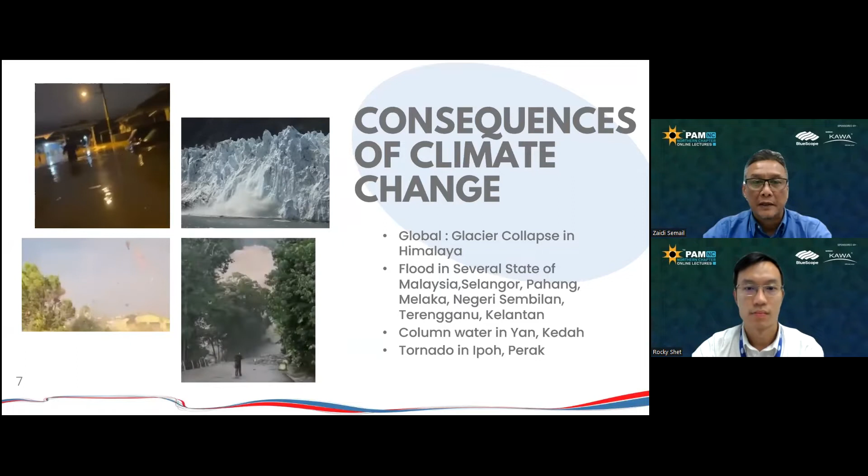Now, what can we do? This is the road to adapting to the challenging impact of climate change. So what can we do? There's a few things we're going to talk about: we have thermal, we have wind, we have water. These are the three main elements we want to talk about. Sound is of course part of the bonus you can get when designing with thermal in mind.

Quick one - so what's happening right now? I think the chairman has said it's man-made when it comes to the increasing of earth's temperature. What happened in Malaysia - because electricity was always so cheap, when I was overseas I noticed this - is that when you feel hot, everybody starts to change their aircon to be bigger. When they change their aircon to be bigger, they use more power. Then to create more power, you start burning fossil fuel to have that energy, electricity in this case. So what we're trying to do now is figure out how we can reduce this usage of aircon by controlling the temperature in our room or building as a whole.

All right, some of you architects have seen this before. This is basically, in our industry, roofing - the ability of metal roofing to adapt or even to have a custom performance that you can achieve easily. It's not like other types where you have a lot of restrictions. If you look at these particular sections of simple metal roofing, you have a metal roof on top, and you start having insulation at the bottom. As you say, you have insulation wool, you have boards, you have a lot of insulation material. Rocky, quick one - I always ask this of most engineers: what is the cheapest insulation in town? You know that?

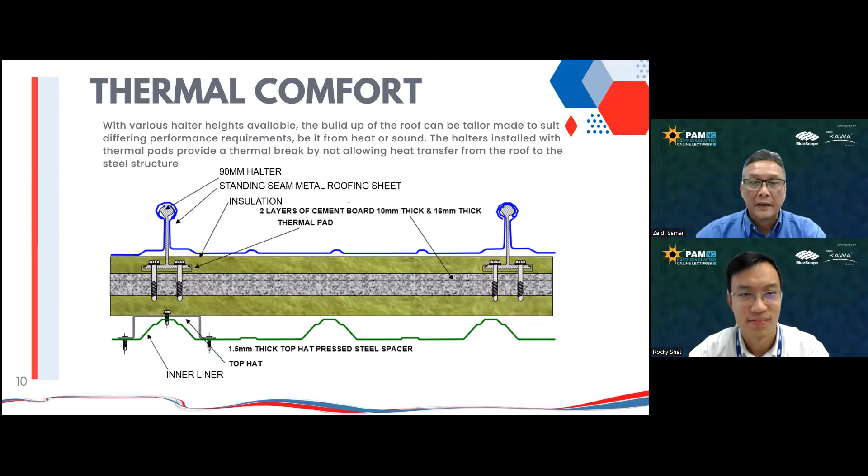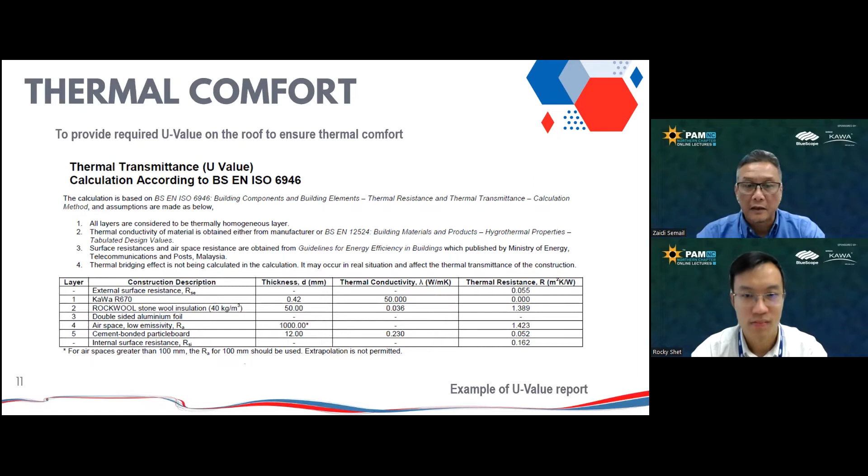I think thermal comfort is actually the ability to resist heat coming into the building. So thermal transmittance, this U value, can be calculated easily. When I say easily, it's just simple mathematics, but you need to get things right in terms of the value, especially the lambda, and also the K value, the R value. So basically, you put all the items, calculate it using the extrapolation formula, and then you get the result.

So this is a simple example: you have a metal roof on top, an insulation wool, a double-sided layer, and an airspace. And in this case, we put a cement fiber board as part of the insulation. As a result, the R value is at 0.8.

The U value must be achieved having the right thickness, not so much about other things. Thickness is very important in terms of catching the U value. So once you have the system, you can come out with a result. An example of this system comes out at 0.32 watt per meter square.

So why that? This system has been calculated as shown in this slide. It is because under UBBL 38A, most architects already know this. The roof U value, MS1525 clause 5.5, for a new or renovated building with a lightweight roof, which is metal and is lightweight, you have to achieve a 0.4 max U value.

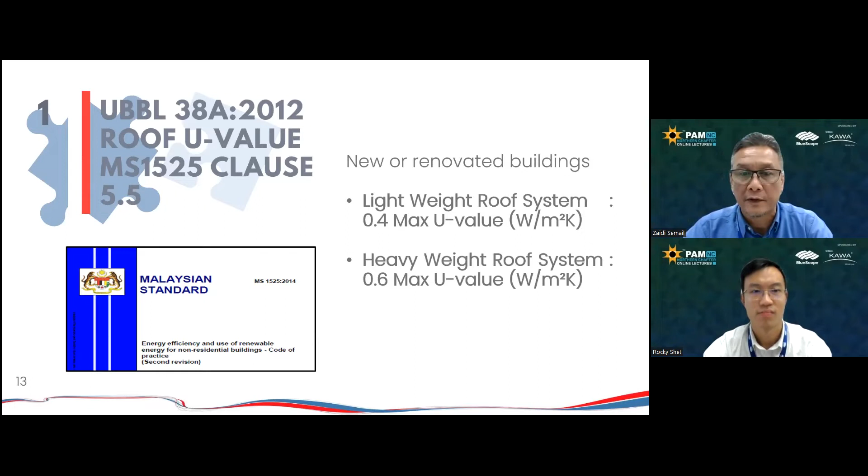You cannot go higher than that, which is no good. I think the lower the U value, the better. In a heavyweight roof, like concrete or something similar, you have 0.6. This is under Malaysian Standard 1525 2014.

Of course, GBI plays a very important role. I think architects have been given this information for GBI, how to achieve the U value, sustainable construction practice, everything. We are the ones who will be able to help you achieve it. Of course, the metal roof is always on the building. The roof is actually one of the biggest elements in a building to some extent. We talk about high-rise, but talking about a normal roof like a house or factory or normal commercial building, most of the time the roof is one of the biggest elements in that particular design.

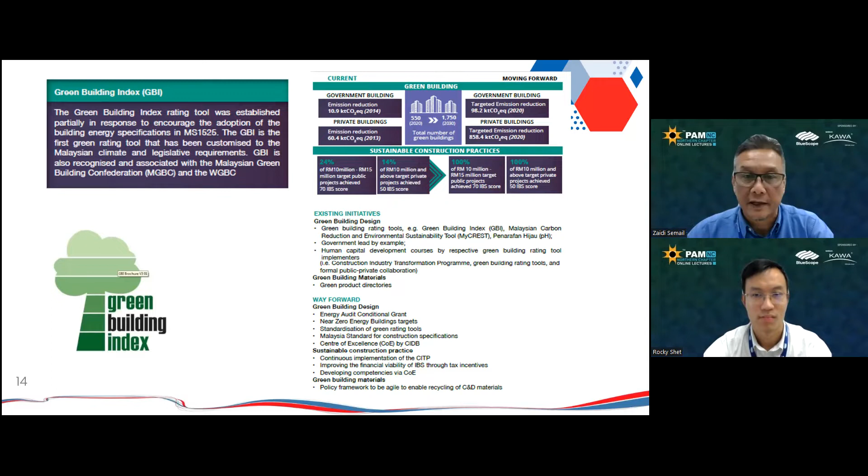Okay, kudos to Pulau Penang. I mean the Northern region, inclusive of Perlis and Kedah, but I think everybody knows it's been gazetted in 2016. I think, if I'm not wrong, among the earliest, even earlier than Selangor, to have this gazetted as part of the rules and regulations. Under 38A, as mentioned, clause number 2, that is the performance that should be achieved to mitigate the so-called thermal comfort for buildings in the northern region. Hopefully other states will follow, but kudos to Penang at this moment. They're among the first to have this gazetted as part of the law. Even though it's a small law, it's still a law.

The other thing under GBI, if I'm not wrong, I read it a bit here and there - I think they call it IC, internal comfort. So once you achieve the U value, you should be able to get sound insulation performance. In our words, we call it STC, sound transmission class. I think everybody should know that. How does it work? How you resist sound from coming into your room - that's where internal comfort comes in.

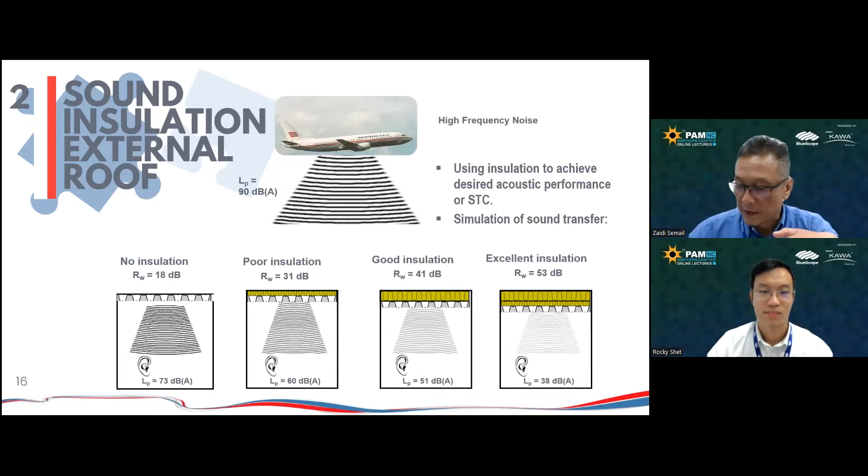The next one is sound absorption. Again, the roof is the biggest element in some buildings, so you can use the roof as part of sound absorption. Part of ceiling is one thing, but for example, when you have a speech, this is where you have an echo all over the hall or room.

So again, the sound and the U value are very much related. In climate change, I think the U value is more important than the sound to some extent, but of course sound absorption and the sound transmission class is a bonus to that building.

Rocky, I've shown my part, what I can do on my system, but there would be other elements that could help with energy efficiency on the system itself. I'm not the only one here, but I believe there are other elements that actually affect how energy efficiency can be measured and also can be helped. Rocky, what do you think?

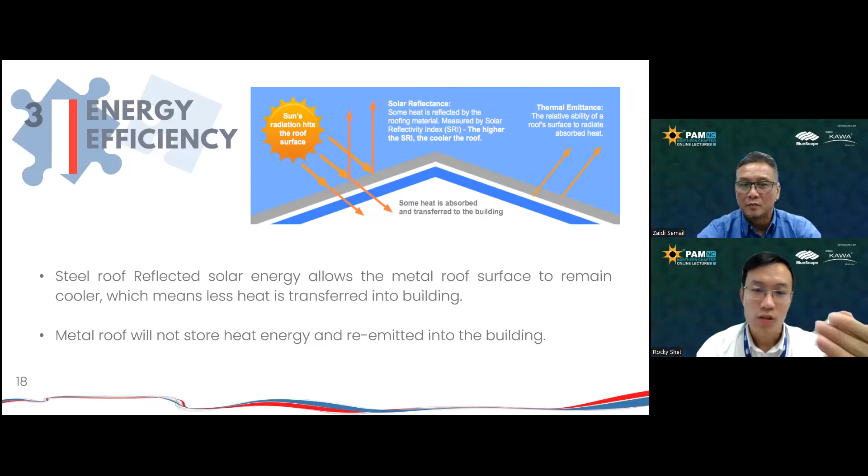Well, you rightly touch on the energy efficiency of the roof system. Most often people don't really look at whatever is physical. In terms of U value, you can see the insulation, you can see the foil. Just now Zaidi mentioned air gap, one of the cheapest and most efficient so-called insulators. So when we're talking about insulation, there's actually a first line of defense that most people take for granted.

If you install a solar panel, you can take advantage of the solar energy and translate that into electrical energy. If you have a water heater, that translates into heating up your water. But most surfaces don't have that function. It's just there to act as the first function of a structure, like a roof, or other components like tarmac or roads, which pave the way for our motor vehicles.

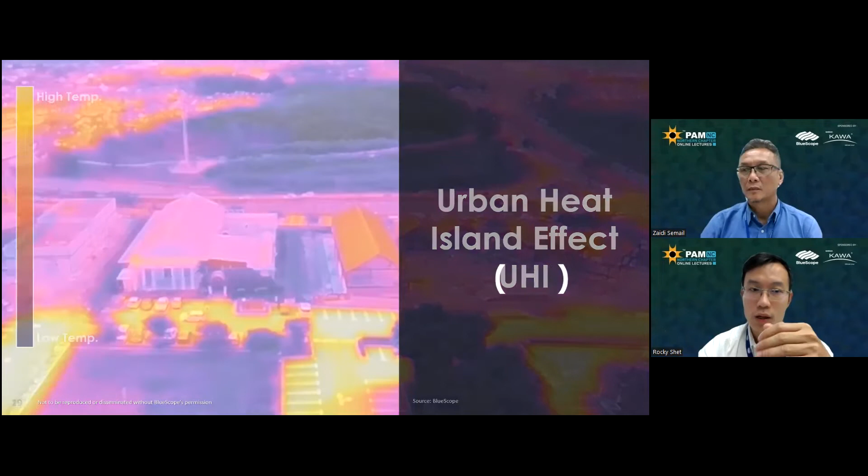But one thing that is most often overlooked is what we call solar reflectance index. Today, aside from choosing the right roof system or designing the right roof system, I'm here to advocate for solar reflectance index for the material side. So solar reflectance index is the first line of defense when it comes to how much heat is being translated into heat from solar radiation.

So typically, if you look at colors, especially external components like roofing material, each color has a different SRI value. One thing you would normally ask—and architects are very familiar with this—is you will always ask for a higher SRI value. And it is rightly requested, and is relevant to how it can fight against climate change or increasing heat in the urban area.

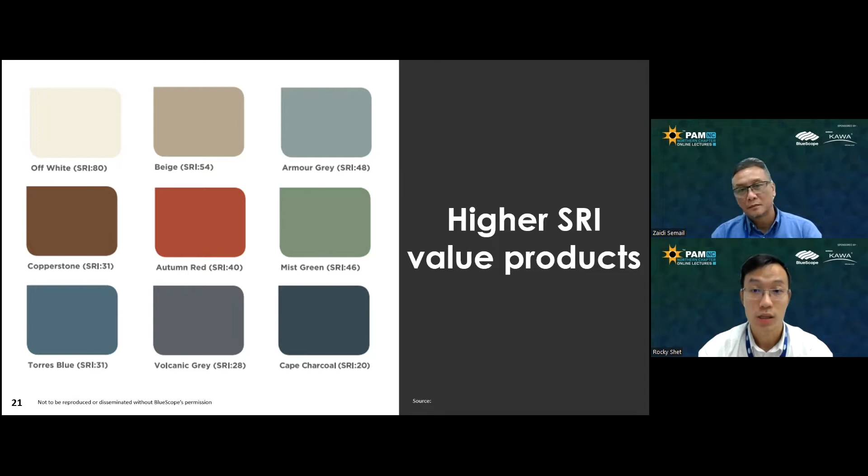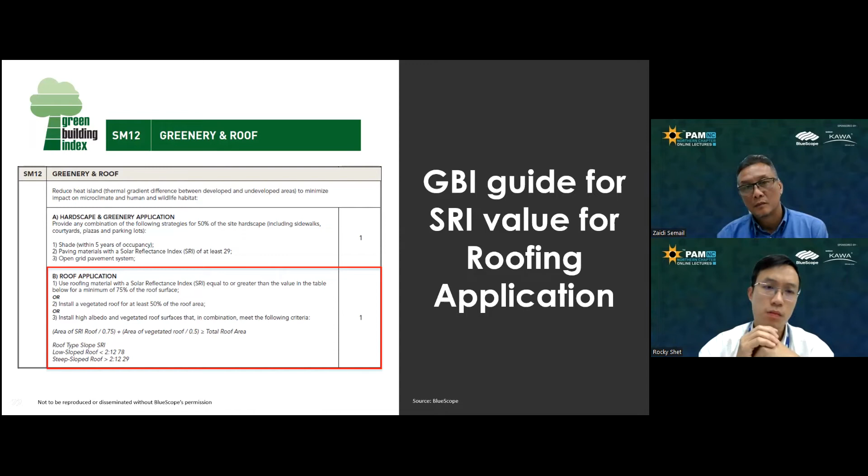And it is also highlighted in the GBI guidebook for different types of buildings. As Zaidi mentioned, roof is one of the biggest components in a building. So if your building is a low to mid-rise house or building, like landed housing or a commercial building, the roof constitutes quite a big part of the external building envelope. So GBI has stated it as one component where you can actually score a point, provided that you reach a certain SRI value.

So if your roof pitch is 2 to 12 pitch, then the SRI value you should achieve at minimum is 78. But this is a unitless number, meaning there's no unit to it. So solar reflectance index is indicated as a number without any unit. So of course, the higher the better.

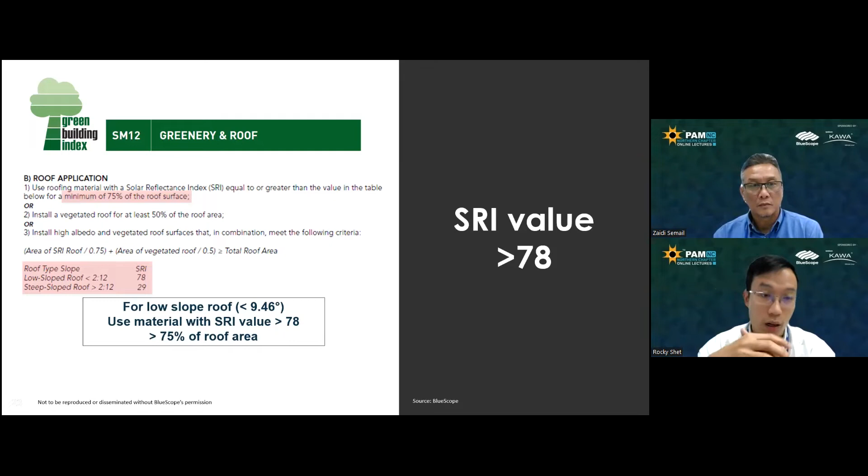But what is the reason for it, and why should you understand more? Today I'll share with you, and how it impacts the overall building. Before I go into detail, without getting too science-centric, you need some basic understanding of it in order to take advantage of it.

When you expose the whole building envelope to the sun, there are components of it that translate into colors—that's why you see colors. That is where the visible light is, the spectrum where you have a light wave within a wavelength of around 400 to 700 nanometers. Beyond that, this is also where the sun reaches the crust of the earth—we call it near infrared wavelength. This part of the solar energy goes through the ozone and shines, reaching the crust of the earth.

This part you will not see in terms of color, but you are able to really feel it, depending on how much of it is being absorbed by the materials surrounding you. Let me share a few examples. Say you have a roofing sheet or the whole building painted black, or certain components of your building are black. Then there's this component of the color called solar reflectance—it's not the whole solar reflectance index, just part of the component. It's used to calculate solar reflectance index, but it's not the whole story.

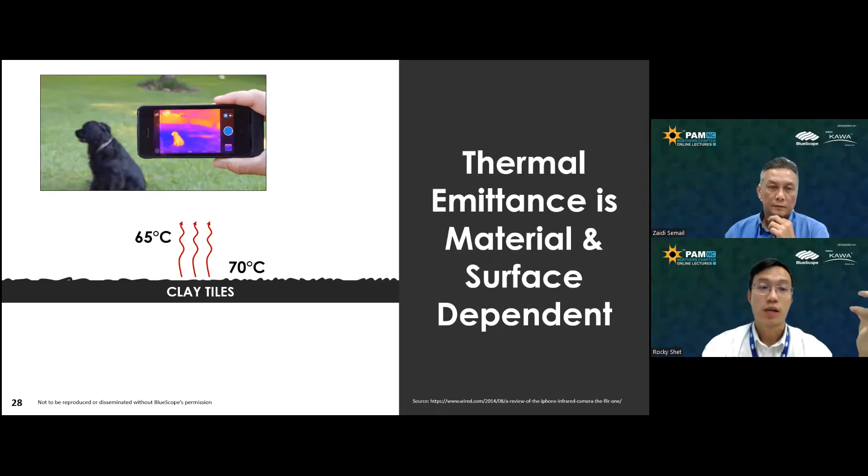So it is actually surface dependent. If you have a surface that readily emits back to the environment, then most of the energy will be emitted back. But if it doesn't, then it will absorb and retain it, not emitting it back as infrared to the environment.

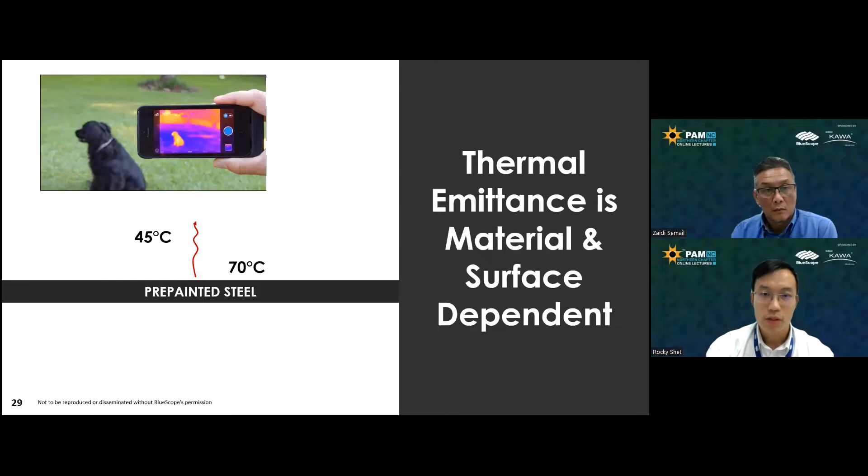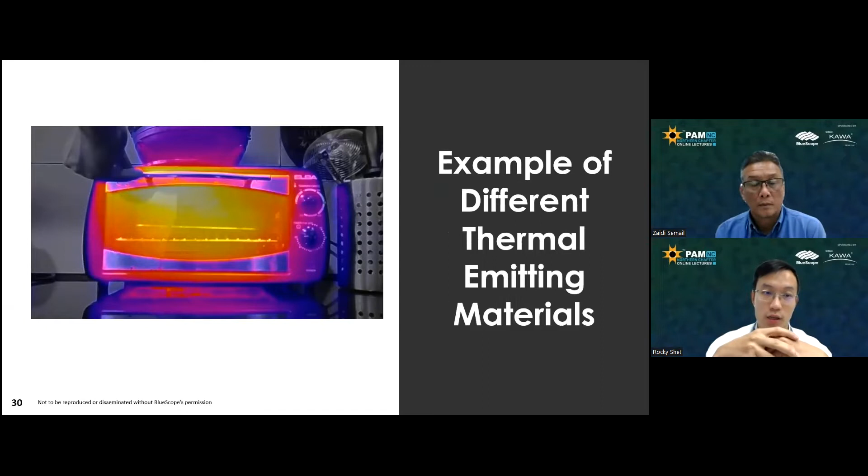What it means is that if you look through a thermal camera, you can see which component has high emittance and which has low emittance. To show you one example, look at an oven or toaster. From this short video, despite the components within the toaster having the same temperature because of the heating element, the environment itself shows the same temperature. But then the glass shielding that encloses the toaster has a different thermal emittance compared to the metal inside. So this is one of the components that leads to calculating the solar reflectance index.

We have to be aware that there are these two components. They are measured and tested on a case-to-case basis. From there, these two components are calculated into an SRI value. And as you understand, for SRI value, higher is better.

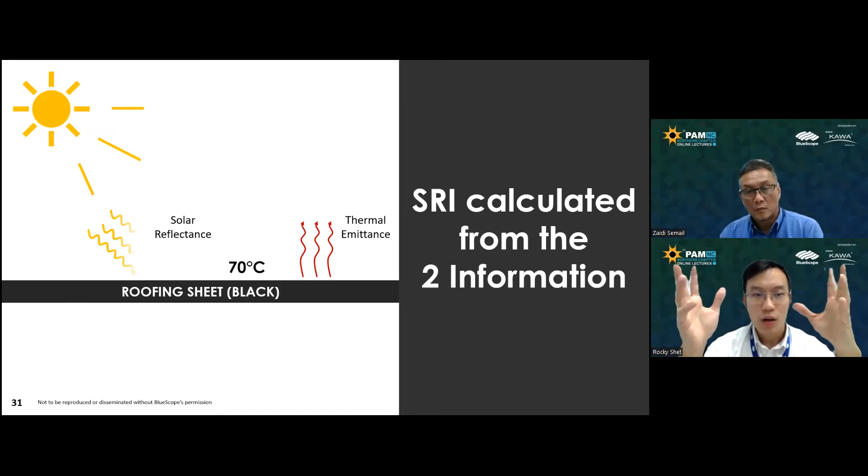So what this means is that if you choose a material with a higher SRI value—especially for components exposed to sun—this criteria would not be relevant if you're choosing an architectural component that is not exposed to infrared or sun. So rightly, it's related to the roof and other envelopes.

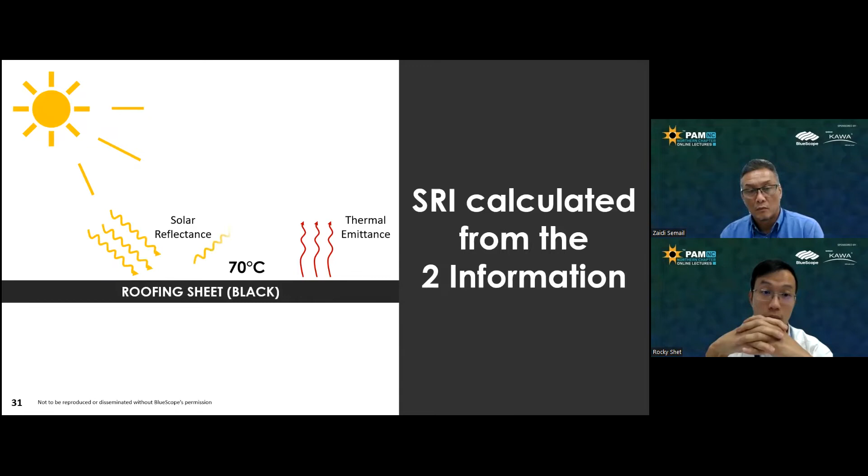You can also calculate this if you search online for an SRI calculator. You can plug these two numbers in to understand how thermal emittance affects solar reflectance index, and how solar reflectance affects solar reflectance index. You can play around with it—there are a lot of calculators online that let you calculate all these values. But at the end of the day, different colors give you different SRI values, and different suppliers or paint systems will give you different SRI values as well.

I'm taking my colors and my product as an example. What you can see is that there's a trend in SRI value, where lighter colors typically have a higher SRI value compared to darker colors. But this is not the end of the story—later I'll share with you that there are certain ways different producers tweak their color, so that if you want to achieve a darker color for certain reasons, there are still options that could give you a different result.

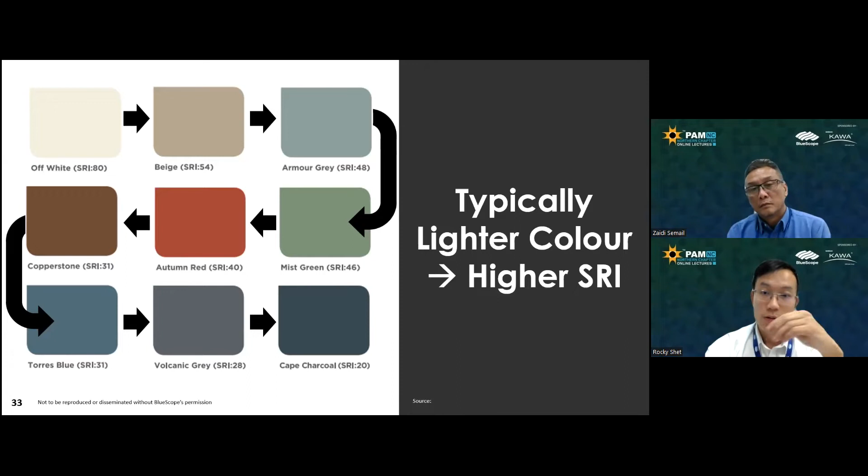Coming back to the picture I showed you earlier, at the end of the day, choosing the color is very crucial when it comes to urban heat island effect. As I mentioned, during urbanization of the population, a lot of surfaces are created because of different buildings. Those materials are good at absorbing solar energy, so you have more surfaces absorbing solar energy and retaining it during the day, which heats up the overall environment. We're not talking about just one house here—we're talking about the overall township.

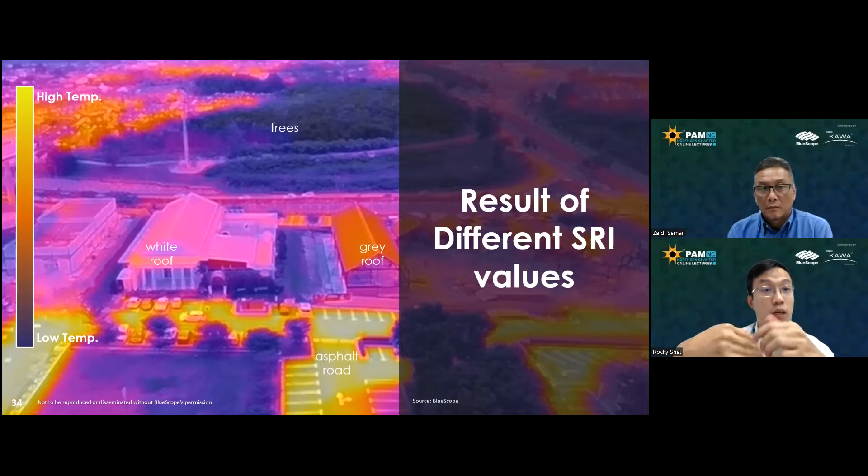If one part of the township is on average having lower SRI value surfaces, then the temperature of it will understandably be higher in terms of air temperature and internal temperature. And of course, it will have a knock-on effect to the energy usage.

That's what Zaidi mentioned at the start of his presentation: if the outer environment, the air space, is heated up, then internally it will be heated up as well. Then you will turn on more higher power air conditioning, and that leads to more energy, because this is not a magical system. When you cool down the space within the building, you are heating up more of the external environment—it's basically a zero-sum game. Your environment will be heated up even more, and this will perpetually become worse and worse.

So SRI value is one of the things you should look into in terms of early design consideration. Of course, this is very easily switched—it depends on how you see the color. So today, with this information, I think it's good to use it as one of the decision-making factors for designing a greener township.

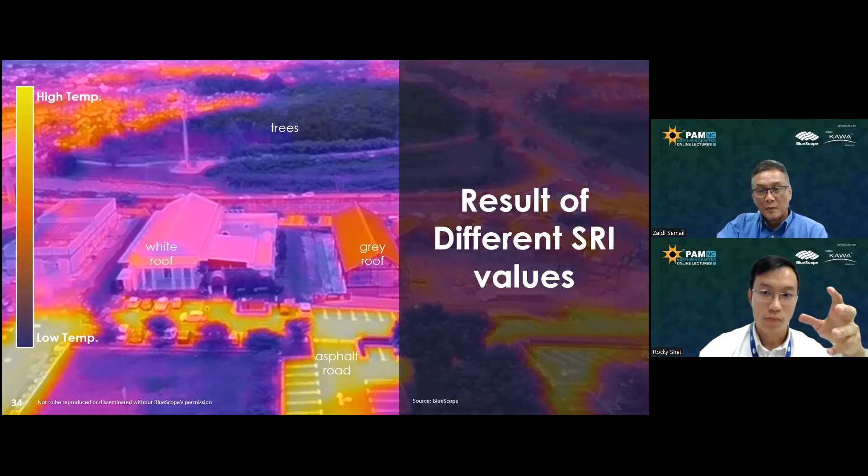So aside from determining the SRI value based on brochures, there are a few practical applications and considerations in terms of choosing material. Maintenance comes into play, and the cleanliness of your building comes into play.

Despite the color selection, when looking at brochures and data supplied by a supplier, despite the SRI value being achievable to certain requirements, the cleanliness of the surface is definitely going to affect how it performs when it comes to long-term heat absorption from solar radiation. So this is one of the practical things you should consider as well.

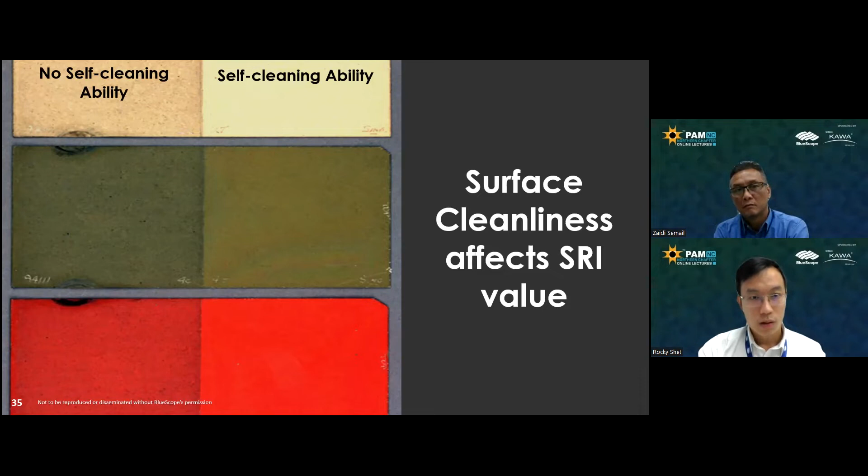So just now I mentioned it's not as simple as looking at the colors and choosing a darker color, assuming it will definitely be worse off. If, for a certain design intent, you want a darker shade color, you can look through different color schemes to reach one that has a higher SRI value while still being considered a dark shade.

But another thing, not really commonly known by a lot of architects, is that there are colors that look the same but are not thermally optimized. So this is where cost consideration comes in—you're choosing colors of the same shade, but how should you choose?

Here I'm showing you the impact of thermally optimized paint versus non-thermally optimized paint. These are data taken from our test back in Australia, to give you a level of awareness. This specific example is a color only produced in Australia, called woodland gray. This color is thermally optimized—so even though you have the same shade of color, you're able to lower the surface temperature of the cladding, meaning a higher SRI value. Compared to a non-thermally optimized same shade of gray, you see the surface temperature can increase from 80 degrees Celsius to close to 90 degrees Celsius.

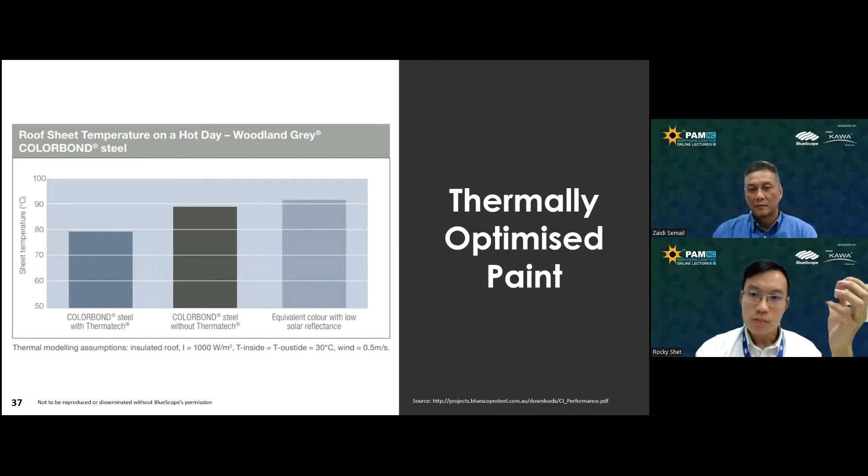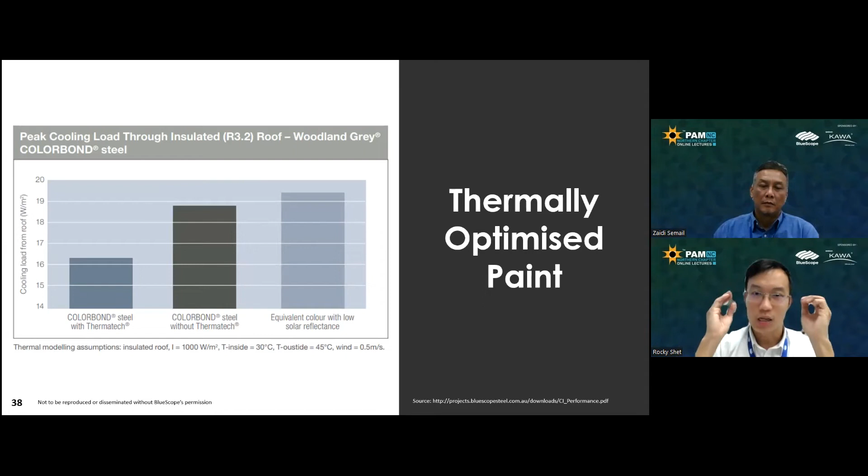If you're not looking at just cooling load but looking at colors, sorry, the cost, we did run some simulations, or rather calculations, with a lot of assumptions to compare across the colors that are readily available in Malaysia. So this is a calculator that we developed for our own internal reference.

To raise awareness of choosing different colors at different SRI values, I'll do two exercises. First is to compare a light color with a dark color shade across our existing colors. Another one, I'll compare a thermally optimized, locally available color to a non-optimized color that appears the same shade but has a different SRI value. Then you can see the cost impact and so on.

These are all quite self-centric, meaning we are only considering my electricity bill, but we don't really consider the overall environment. So this is more of a selfish way of looking at the cost saving. It does not consider the overall environment consideration, but of course overall we know that higher SRI definitely is going to be better.

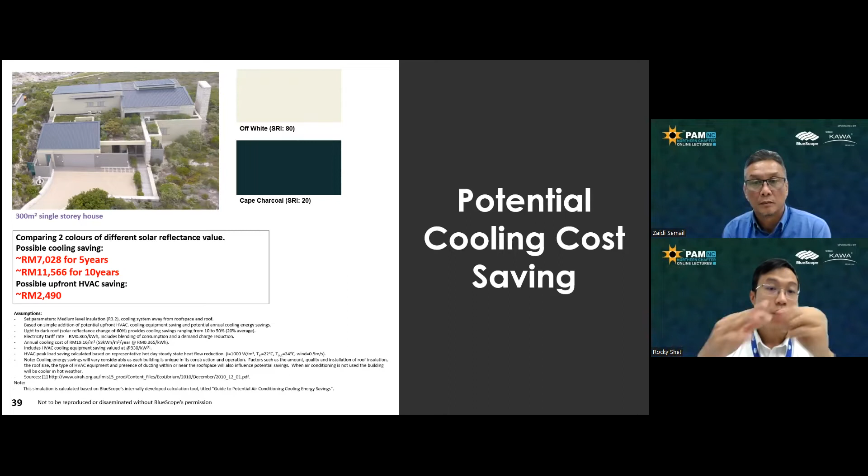Here what you're seeing is a comparison of off-white and Cape charcoal, the spectrum. Off-white with an SRI value of 80, and Cape charcoal with an SRI value of 20 - quite a big spectrum. From here, our calculator puts in a lot of assumptions, including electricity consumption, the average consumption rate, and the cost of the electrical tariff.

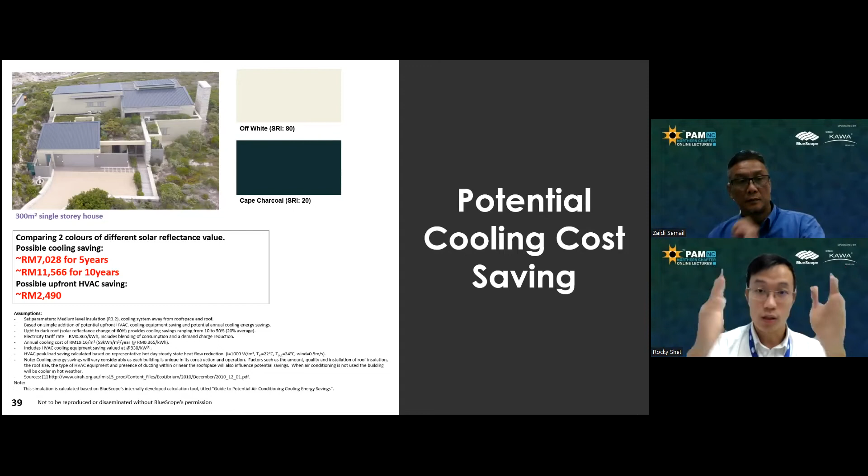We assume the house is a single-story house at a 300 square meter footprint. From here we calculated the energy saving. If you choose a higher SRI value color of roof, then you get somewhere around 7,000 ringgit in savings over a 5-year span. In terms of electrical saving, you could be looking at around 11,500 ringgit of saving for a 10-year span, just by choosing the color.

And of course there's a possibility, because you don't need to increase the cooling intensity or the horsepower of your air conditioner, you can actually potentially save on the air conditioner unit power. These figures are being normalized and cut into small sections. In today's commercial market we know there could be a jump between horsepower, so this is just a calculation to give you an idea - you could be looking at around 2,400 to 2,500 ringgit of upfront HVAC saving in terms of buying a lower horsepower air conditioner.

So like I said, this is just an exercise, it's not to be taken as true. It's just an exercise to inform you of the impact of choosing the right color.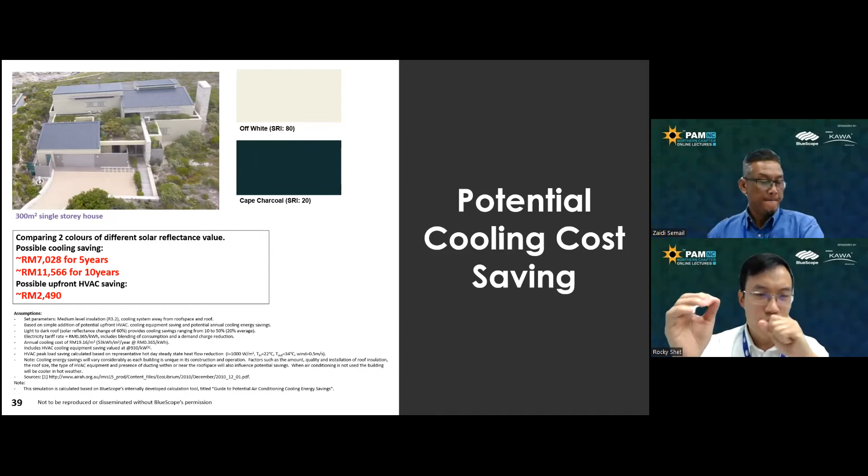The same scenario, but everything stays the same, including the footprint of the house and the height of the house, because a single-story house is used to show you the extreme of it. Armour Grey with an SRI value of 48 versus a generic gray that looks similar to Armour Grey but is not thermally optimized, for example with an SRI value of 40. We did consider this non-optimized color to show you the impact. Here you can see the impact is lower because you're actually choosing between two same shades of color, but one thermally optimized and one non-thermally optimized.

Based on our calculation, you're looking at 1,700 ringgit of saving for the thermally optimized one within a span of 5 years. You can do your own division to analyze it.

You're looking at 2,660 ringgit of electrical saving over 10 years, and possibly an upfront HVAC saving of around 700.

Practicality is another question. Today the exercise is to show what could be possible from a selfish perspective in terms of energy saving. If we consider the whole township, it's probably not a zero-sum game, it could have an even larger impact on creating a cooler environment. So many factors come into play that we won't dare to give assumptions for, it's too much to assume.

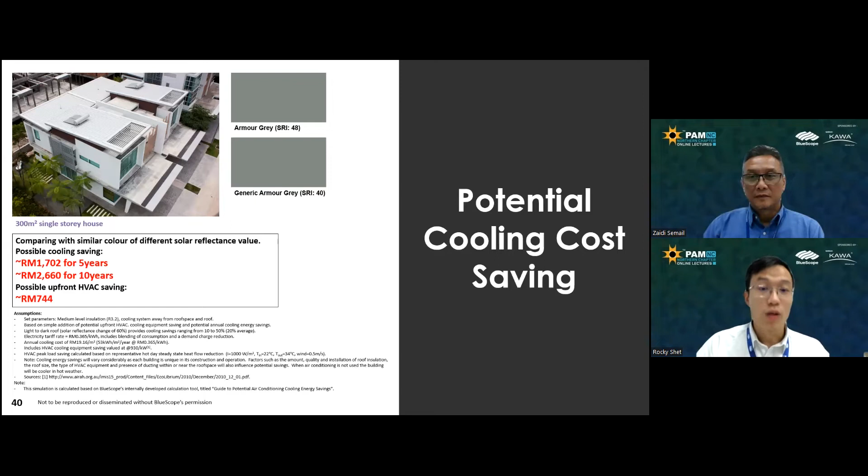So to condense all that, Zaidi, I'll ask you a question. Based on all we've presented, the U value, the sound transmission class, the SRI value, have you seen a good case that can really be practically applied to the Malaysia context and has been successfully done involving Unison in Malaysia, so we can show it's really possible here?

Thanks, Rocky, very pertinent question. In our case, United Seasons or Kawa Roof have been involved in many airports - part of Senai Airport, Melaka Airport, KLIA, Kedah Airport, Kuantan. One of these is the airport in Sandakan. When you talk about airports, most of the time it's a building that works 24 hours, especially international airports, and they use a lot of aircon to cool the building.

In the case of Sandakan Airport, we designed to achieve a U value of 0.32, which is very low. And as I said, when you have thermal performance, you also have sound transmission performance - in this case we achieved STC 42.

And as you said, choice of color is very important. In this case they wanted white, but I think it's too clean, so Gull Grey was next in line. We have SRI 66, which is very good, and I think the longest length of this roof is about 30 meters, using thickness 0.6. These two details, roof length and thickness, relate to what we'll talk about next.

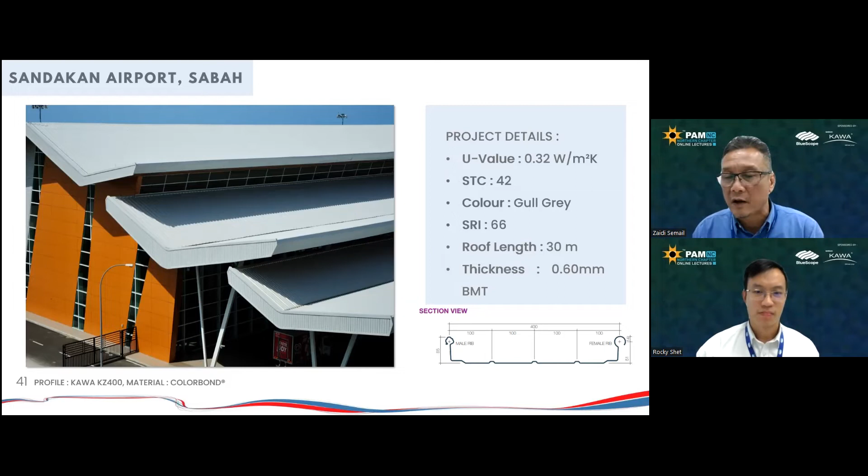This is one example, but we have many more. The project in Siem Reap, Phnom Penh, used white color as part of the design, merely because it's 24-hour international operation and the aircon needs to make a lot of savings.

So let's move to the next thing. This looks bad, Rocky, this is near our place. What do you think about it?

Well, you mentioned changing weather - I think changing wind is relatively invisible until something happens, meaning you have gusts of wind you don't really see or feel. I mean you do feel it, but people normally question and start asking only when things like this happen.

But I think it's too late or too reactive to ask the question after things happen. From this case, and with airports as you mentioned, we have to be more proactive in probing whether the current design, current practice, and current way of procuring components is still relevant as we're describing climate change.

There's a lacking in terms of time sense - the pace of climate change isn't constant, temperature increase isn't a steady 1 degree per year. If you look at history, it's accelerating, and our buildings are designed to last quite some time. So we have to design probably 10 or 20 years ahead to account for all this. The short-term cost is something we really have to discuss, especially with investors paying the money, and put real effort into convincing them why they should invest more.

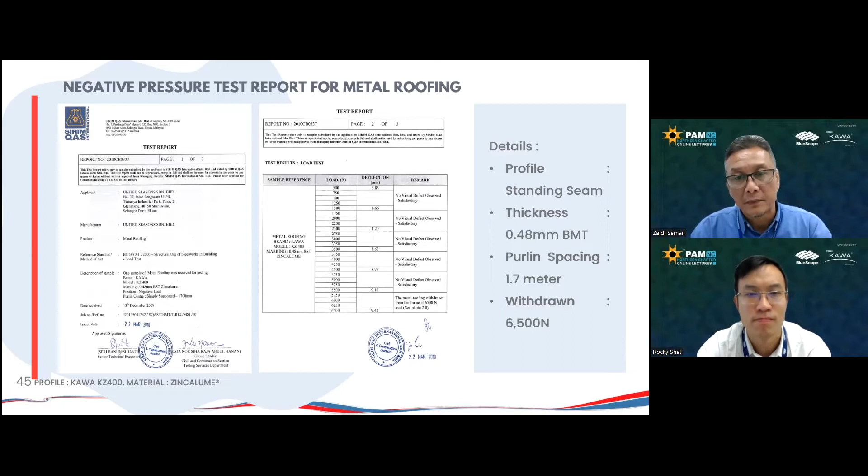This is to make sure designers eventually understand the importance of thickness and design, and the selection of profile to be used in their design. In Penang now there are a lot of big factories with very open areas, so we have a lot of wind, and they are very near to the sea.

And the wind from the sea sometimes can be very strong. In our industry there are many profiles. As I said, one of our profiles actually originated from Japan, which is subjected to typhoons, to very high wind. So we brought it here not only because of the wind, but because of this system's ability to span.

If you look at this test report, we are using the same thickness, 0.48. But if you notice the test span mentioned on the left side of the report, you are spanning at 3 meters, twice as far as a normal design, as locally designed by engineers at 1.2 or 1.5.

So even at 0.48 or 0.6 mm BMT thickness, the force to dislodge the system is actually 13,200 Newtons, almost 1.3 tons of load or force to move the system from the roof. That's a very high wind - you're talking about almost an F3 kind of wind speed in Malaysia.

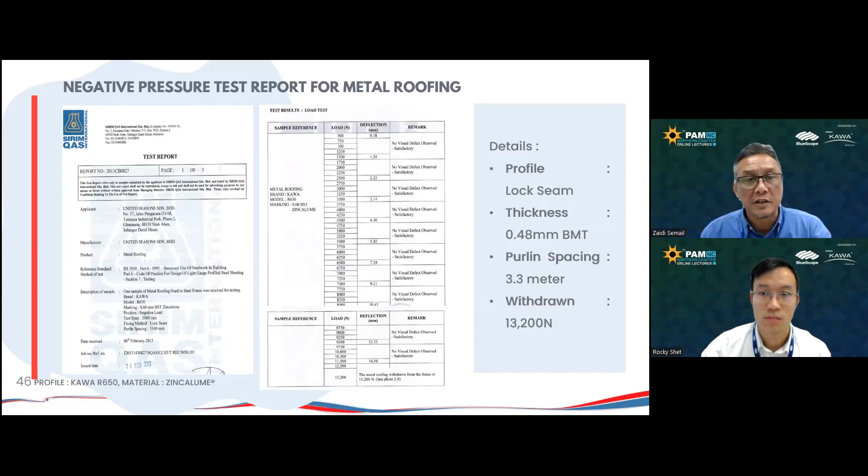So this is one of the systems we have, and we should also compare when we have a load - one of the elements in our industry is talking about deflection. Deflection is very important, because if you deflect more than what it can take, it won't go back to the original shape. In this case, our KZ was slightly less than the R650.

As you know, the rate is higher than the KZ, but even at almost a ton of force, only about half a ton, it deflects about 13 or 14 mm in this case, and the 650 performed very well, even at almost a ton of force, at about 12.35 mm, until it dislodged from the system and was withdrawn from the frame.

So deflection is one of the elements that matters, because once you have a deflection, this is where we're going to talk about water. When you deflect, it doesn't go back to the original state - you create water ponding, and water ponding is one of the elements that will eventually affect the material's performance.

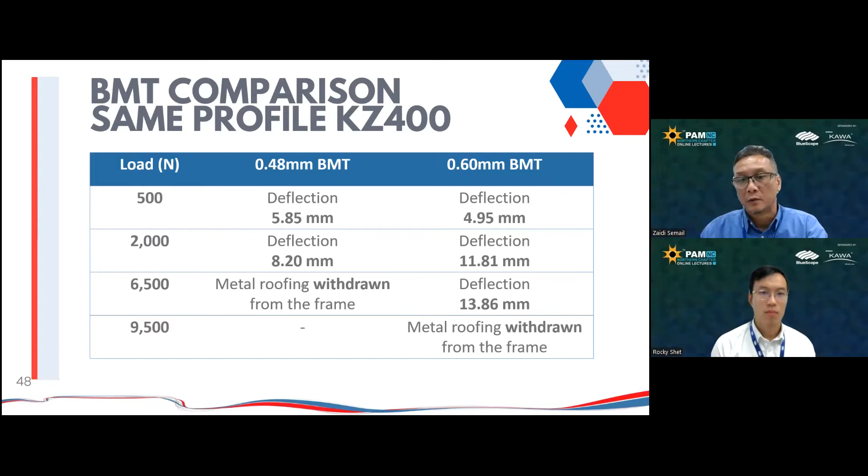Of course, we also compare - you can create, as I said, the proper, correct profile and correct thickness. In this case, you have two thicknesses, either 0.48 BMT or 0.6 BMT, so they have different results. But even at the lowest, 0.48, you still need about a ton plus of force before it actually withdraws from the clip, or fails to take the force of wind in this case.

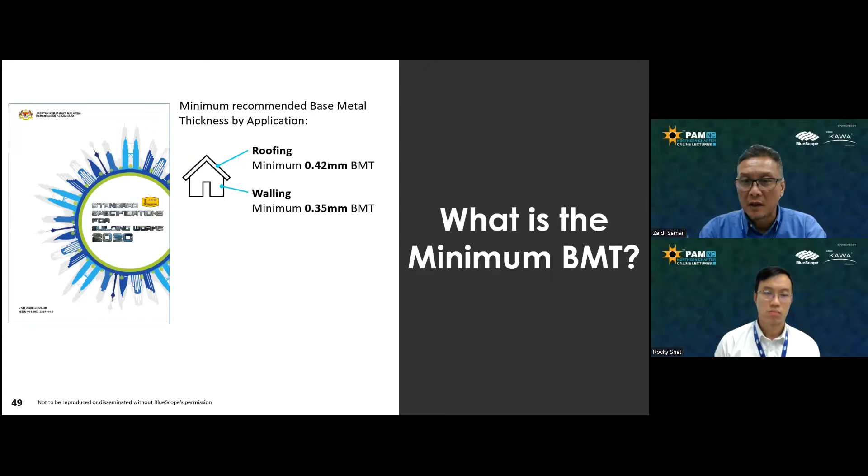Okay Rocky, as a comparison talking about thickness - how important is this thickness, and how do we actually put a proper thickness in a proper design to make sure things work properly in this case? I think this is your expertise.

I believe there would be more information from the manufacturer of the coil about how this thing works, and the best way to specify it, and even the best way to select in terms of material thickness in this case.

Well Zaidi, you asked a really important question. I think when it comes to base metal thickness, because you don't see it, a lot of times we encounter lack of specification on this front. And Zaidi, the test data you showed earlier is more important than calculated or simulated data, because you can never calculate failure - failure is chaotic. So whatever they've shown is very relevant in terms of how much force it would take to fail a certain profile or certain thickness in a certain profile.

I think just to highlight back your slides - just now you shared a slide of different thicknesses that would have an impact in terms of the pull-up stress, the so-called wind load line.

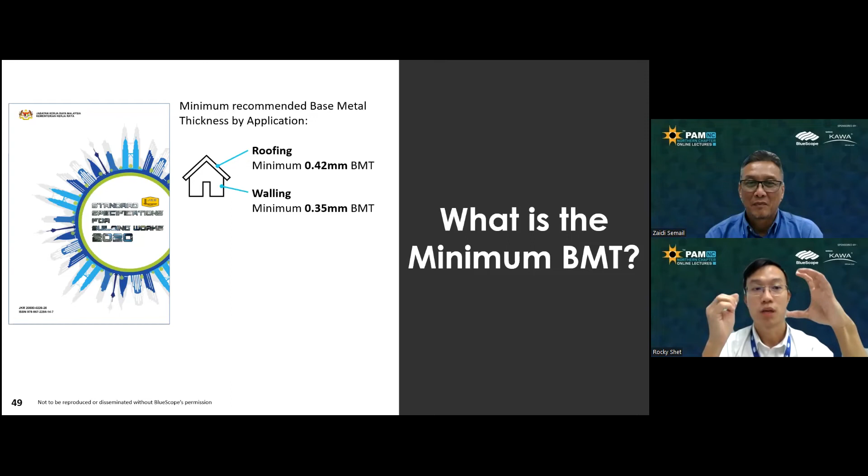I'm quoting JKR's standard specification document here. From JKR's perspective, they have a guideline for all their JKR members across the country to make sure they adhere to this bare minimum. This bare minimum has also been practiced in the market, but increasingly, a lot of people lost sight of it because the highlight on cost is much more prominent than the specification.

So just to recall your memory, in JKR standard, the roofing bare minimum base metal thickness is 0.42. And for wall cladding, if you use it for wall cladding, then the bare minimum that you should go is only 0.35 mm base metal thickness.

And if let's say you have lost touch in terms of this industry or this type of product, let me just remind you, base metal thickness is not referring to the overall thickness of the material. So this is really crucial why we should specify the base metal thickness instead of overall thickness.

Okay, I'll put you a scenario. Imagine you have specified a certain thickness, say for example 0.48, the thickness that Zaidi has tested and specified in the slide earlier. So what happened is that the practice is not ideal in this industry.

There's always a loophole. You specify 0.48 thickness without specifying its base metal thickness. What will happen is that when they do sourcing, contractors propose 0.48 as commonly understood as the overall thickness - meaning if you specify it as base metal thickness, that's different, but if you just specify as thickness, most contractors will take it as the overall thickness.

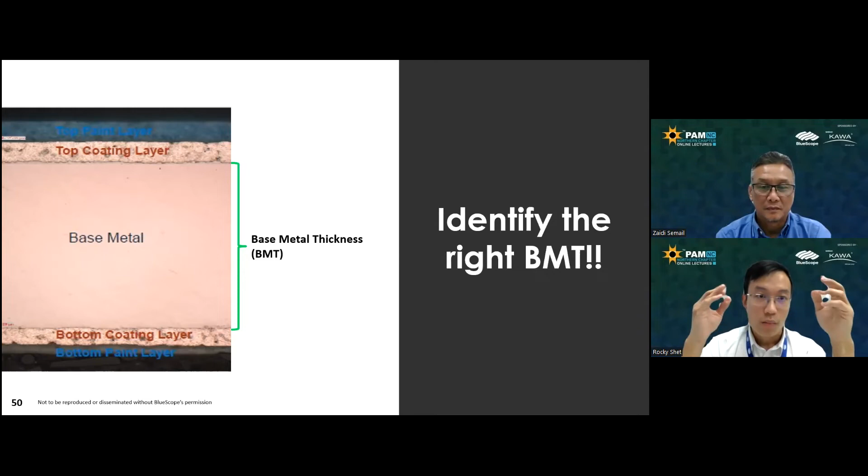Second, the increased price of these commodities, all these different components, that will lead a lot of people to consider how they should source. But again, those commodity prices are just fluctuating, and we are not designing for the short term. We are designing for 10, 20 years, and down the road, if anything happened, you will easily spend double of what you spent earlier.

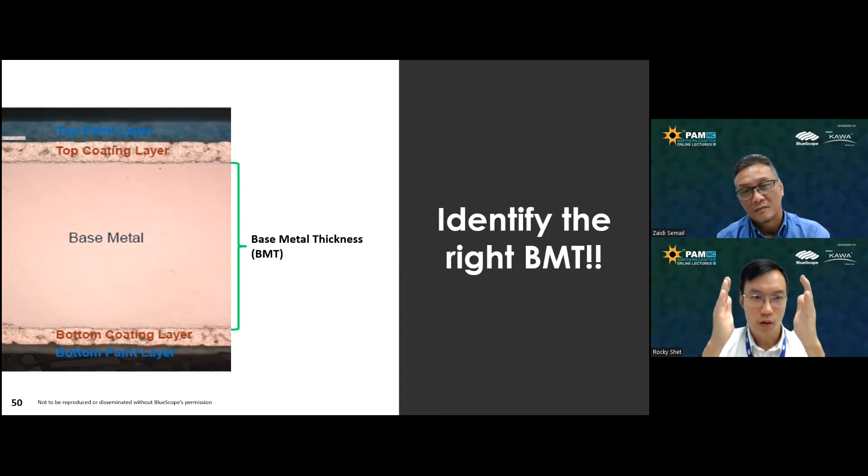Because you need to manage disaster, you need to manage how people look at the building. So all these come into play, which are not part of the consideration when people look at cost saving or value engineering, which should honestly be on the table during the discussion.

And with the data that is shown by Zaidi earlier, you are able to use this information, take advantage of all this information as part of the decision making.

So I can show you some less severe cases of insufficient base metal thickness. Of course, this is not every day you see a roof collapse immediately after installation. But a minor one, you will see here and there, like roof dents, caused by lack of thickness.

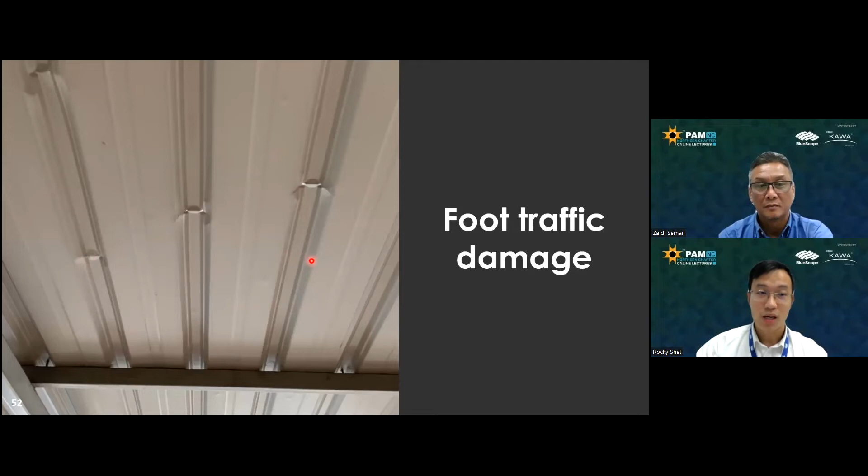Bear in mind, this is still widely sourced and widely used in the market because of the retail market. In project, there are specifications. People tend to choose good product because there's specification, because there's an architect. And you guys make a really good gatekeeper to source the right product for the major investors.

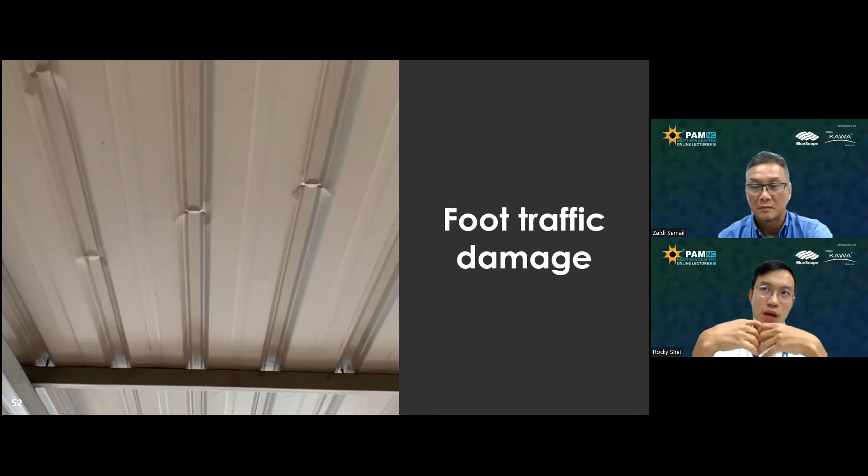But for retail purchasers, they are lacking information, lacking understanding of the product. So most often it's influenced by how the person sells to them and also how much they can afford. And most often that is where we see roofs flying off, because you look at the building, it's kampong houses or rural houses, because they lack all this understanding.

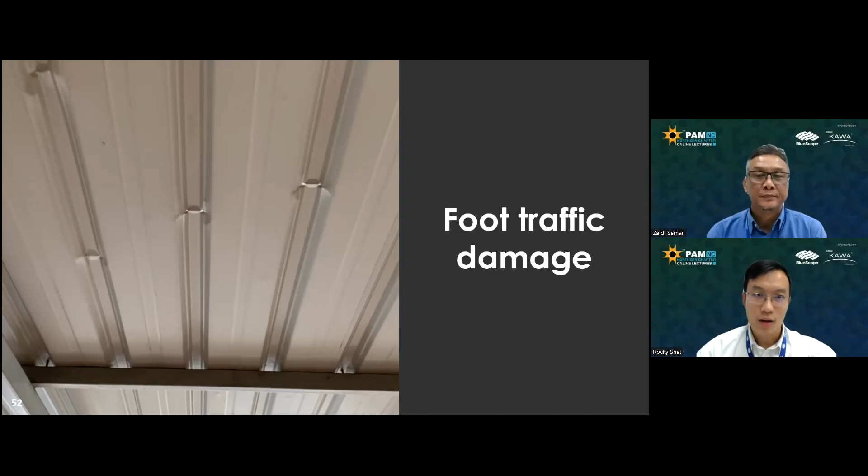So I think professionals, we should be one step ahead of that. And when it comes to this changing wind condition, definitely you need to design ahead, and consider the scenario ahead. And again, come back to you, Zaidi.

Of course, base metal thickness, and also just now you mentioned different profiles, mainly for airports, right? Have you seen the most extreme success stories that you have done and been involved in, and what is so critical about that roof that you would like to feature today?

Yeah, okay. You have said well in terms of the thickness required. I think one of the notable projects that we have done is a MAS hangar, we call it MAS hangar 6. I think there's two hangers over there. The far one in the photo we call hanger 5. The nearer was hanger 6.

Proud to say that this hanger 6, or what we call the A380 hanger, was the widest columnless hanger in the world at one point. They have a column-free span at 230 meters wide open space. Again, when you have a wide open space, you have a lot of wind force, especially an airport concern, where we have a lot of wind force.

This thickness of 0.6 was selected because of that, and also the design of the support is actually at every 2.4 meters, again twice as far as the normal 1.2 that's normally designed by the engineers. Then for the roof length, if you look at it, one side of the roof is actually 115 meters at a pitch of 2 degrees.

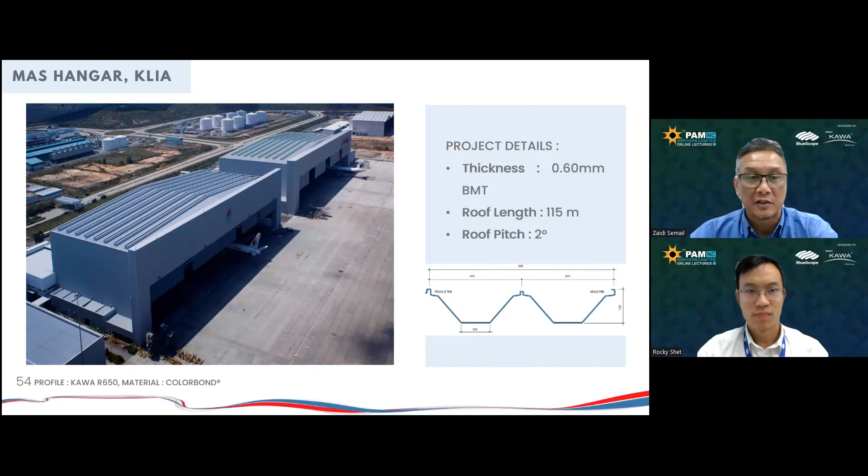This is the next thing we're going to talk about: how do we handle the water flow when we have such a big design building in this case. We'll talk about it next.

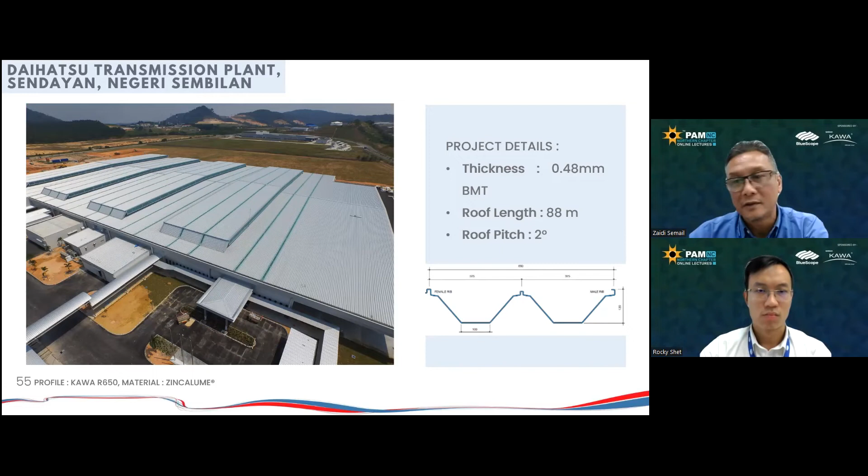And well, you guys still have the Axia Perodua engine running all the way nowadays. Okay Rocky, have you been stuck in a jam in KL lately?

Everybody's scared. For the past few months we have had at least 4 times flash flood. And this, again, as the chairman has said, one of the first elements is that water has risen - in this case rain has been getting higher and higher in terms of intensity. Hope you don't get stuck anywhere in KL lately, okay? What do you think?

Well, if you ask me, of course everyone - I think everyone within the tropical region would definitely feel in some capacity how there is an increase in rain intensity, or rather frequency of rain or precipitation, as the technical term. This again points back to how we look at the roof design, to make sure we design it to mitigate all these catastrophic or chaotic events from happening. But I think one thing is for sure, is that we have increased rain intensity.

Absolutely, and when that happens there will be minor cases of, say, leakages and whatnot. Sometimes the building owner, manager, maintenance people will just brush it off, like, oh yeah this is only happening once or twice. But I think it's good to be aware how the roof can be designed, and rightly so, the profile selections will be relevant in this case.

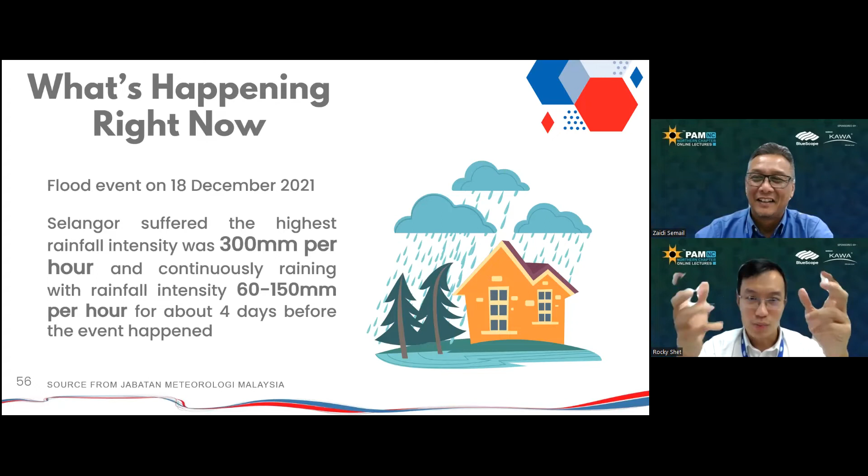And of course we'll be talking about how the material gets impacted. Let's say there are just minor leakages happening - in the long term it does affect the building performance. So Zaidi, maybe you can share the facts and figures and what we can do to mitigate this intensity, this new so-called new record high in terms of rain intensity.

Yeah Rocky, when you talk about minor leakages, in our industry we have a saying - as you said before, nobody actually really considers the roof until it leaks. When it leaks, everybody's looking at us, saying hey, why is it leaking, kind of thing.

So quickly, as I mentioned earlier, due to climate change - we believe it's 100% climate change - in Malaysia now, Selangor had never been flooded, I think, unless you are in Kelantan, which is what's called a yearly event, which is not an issue to them. So December last year, 2021, we in Selangor suffered the highest rain intensity, which was 300 mm per hour.

Actually, at 300 mm per hour you already get that kind of flooding. But what makes it even more severe is that it kept on raining - it kept on raining for 4 days until, of course, I don't want to talk about the drain or the river itself. And as the chairman has mentioned, even in Penang now, once you have the water rise from the sea, I think the flow of water will be very slow from the river to the sea.

So again, in our industry, what are the things you must consider? I think in the design, in the architect design - again, in Penang I have seen lately a roof that is actually 100 meters long, in terms of a design for a big factory.

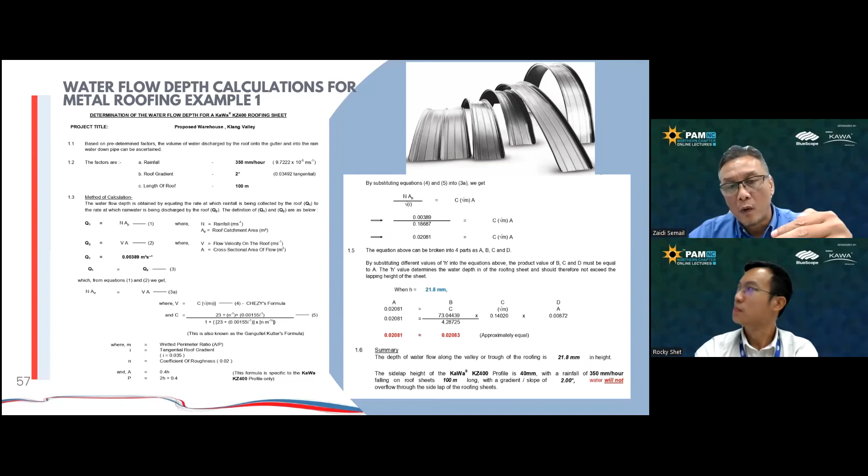You have the flow rate of the water. You don't have to understand the formula so much, but once you simulate it, you can understand the height of water that causes it to flow, leak, or overlap. I'll show you why we call it overlap.

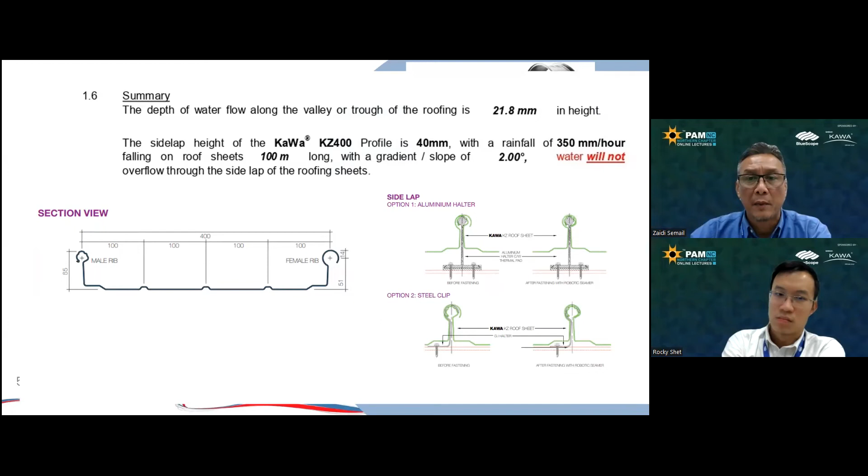With that parameter of 350 mm per hour, 100 meter length, at 2 degrees, the water is actually at 21.8 mm in height. This shows that at your roof, at 100 meters almost towards the end, the water level is at approximately 21 mm rib height.

In our industry, people always ask what is your rib height? In this KZ example, we have a 55 mm rib height, but the water should actually enter your roof once it reaches what we call side lapping. The KZ profile has a 55 mm rib height, but the side lap is actually 40 mm. The water shouldn't reach this 40 mm height level, otherwise it starts to leak - what we call side lap leaking. You don't create a hole in the roof, but you still get side lap leaking.

This is a consideration when you design a roof. Some architects I've met before ask, can I do 1 degree or 0.5 degree? Yes you can, provided you select a proper or correct profile.

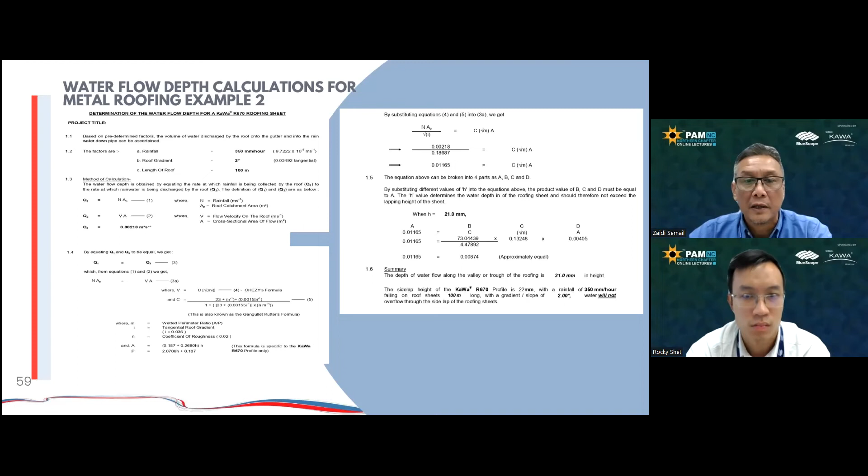So let me give another example. This profile we call clip lock - everybody knows clip lock. If we put similar parameters, 300, 350 mm per hour, 2 degree pitch - which most industry players say is minimum 2 degrees - and consider a 100 meter length of roof, the depth of water flow along the valley or trough of the roofing is 21 mm rib height.

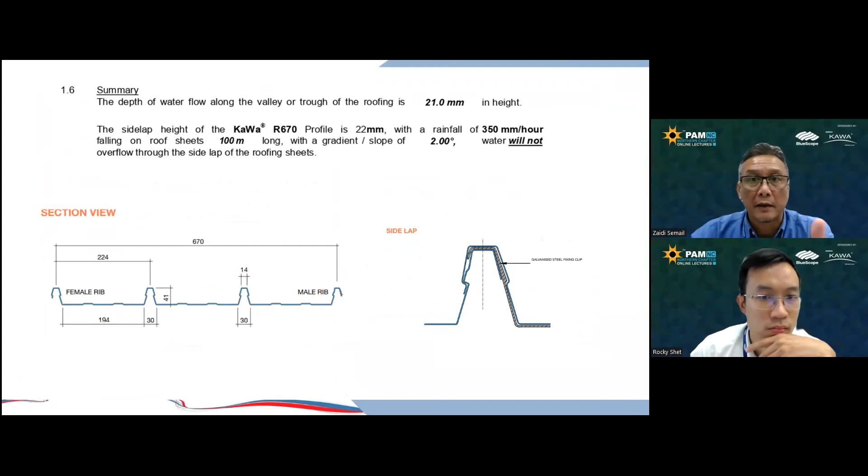In my experience with clip lock profiles, I think the highest rib height is around 43 mm among manufacturers, and the lowest, if I understand correctly - a very new one - is about 25 mm. I don't know why they created a clip lock at 25 mm, but anyway, in our profile the rib height is 41 mm, but the side lap - where water can enter into your roof - is only 21 or 22 mm.

Once you have rainfall intensity at 350, 2 degrees, and a 100 meter length roof designed using clip lock, the water height is 21 mm while your side lap is 22 mm. You don't have much safety factor in this case.

There's no shortcut to design a roof. Once you don't have that much safety factor, you are actually creating a disaster to happen in the future. Most of the industry players, there's a lot of bad actors out there.

What I'm trying to say is, if they explain something, the explanation must be right. You know, my rib height is 41, don't worry, your water is 21, you only have 50%, but that's just not the case. You have to understand the technical part of it, your side lap. Once you reach your side lap, you actually enter into a land of disasters on your building.

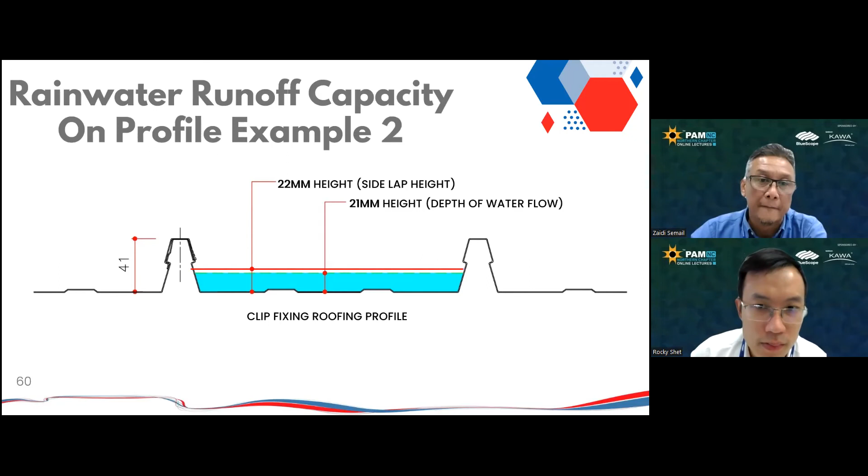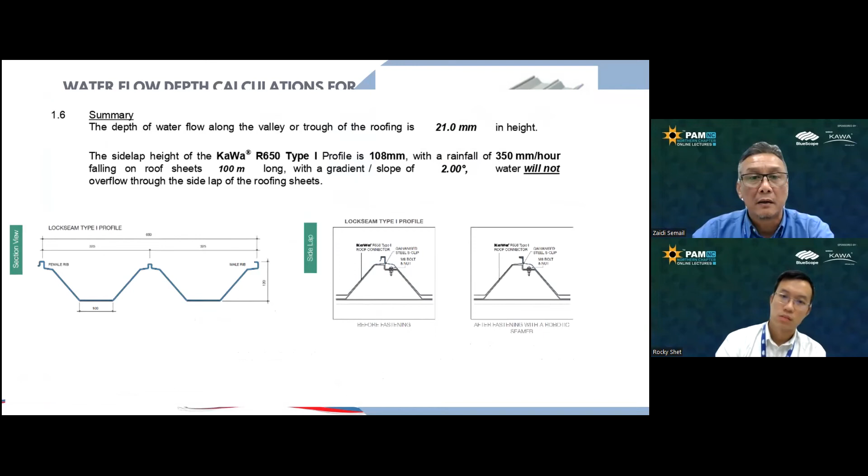This is the same case, same parameters that we put for rain situation or water situation. So the water actually has 21mm height, where the side lap is actually at 100. I think this is so much safety factor. But it's not only the water in this case, because we have three elements: wind, water, and thermal.

Thermal is more or less how you use the insulation, but the two elements are the wind, the force before it dislodges from the system, and also the water. So this water actually has basically used only—

Almost 20% of the performance of the roof. So you have no need to worry. In fact, if 2 degrees was a bit high to some extent, you can even reduce your angle to 1 degree in this case, and it will probably still perform as it is.

This is important to understand: in this situation of climate change, the wind and the rain have so much changed the way that we design and how we adapt our roofing. And roofing doesn't change like fashion, you don't change your profile every year. So it will be used for the next 10-15 years without changing so much.

So the data or the information must be correct. You won't be able to get a new type of roofing next month like fashion, winter clothing or summer clothing kind of thing. So this is the other case around.

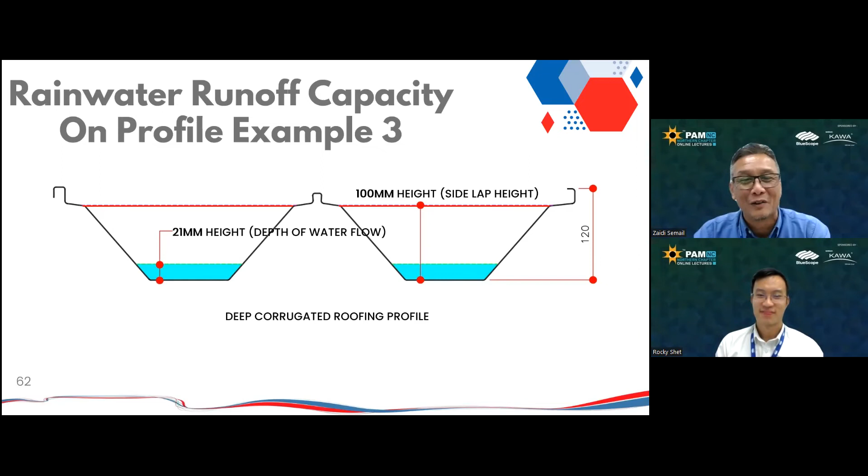This building was installed, I think, in 2010 or 2011. It has been through so many changes of rain or wind in Tanjung Malim nowadays. I would say this is among the notable projects that we have done, and at that point in time, we have seen a glimpse of the future, how things will react in the country and the environment in this case.

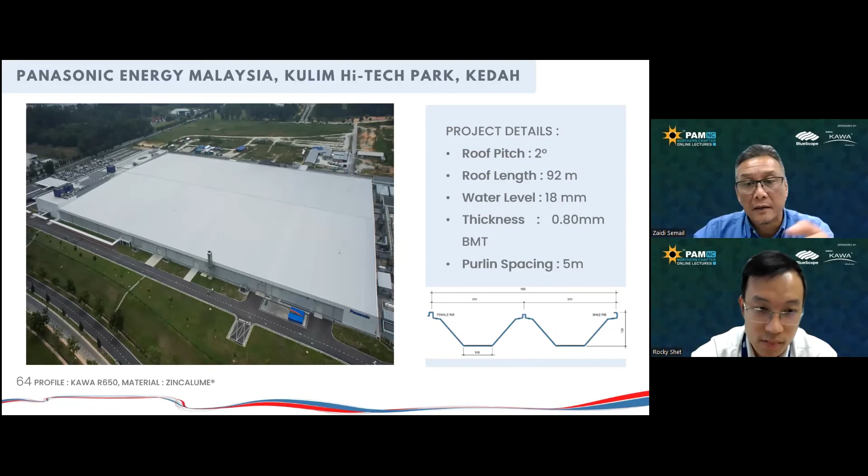This is another one in northern Kedah, in Kulim Hi-Tech. Again, the designers created a very low pitch at 92 meter roof length, water level at 18mm, which is no issue up to now. Again, the thickness is 0.8, to span the purlin, that kind of thing.

Now, what if the water level is higher than the profile? What kind of effect or consideration affects the material performance that we can add into this presentation on climate change? It will happen one of these days, so when the water is too much and the profile is unable to cater for the water in this instance.

Zaidi, just now you highlighted the different choosing of different profile. You can see in certain scenarios the water level is just too close to the side lapping. If it's over, disaster struck—but what kind of disaster? It's not as catastrophic as wind, where a gust of really strong wind could uplift the whole roof. In terms of water, it could just be leaking here and there that can easily be brushed off, until the point where it's just too late. So this is where it's quite dangerous.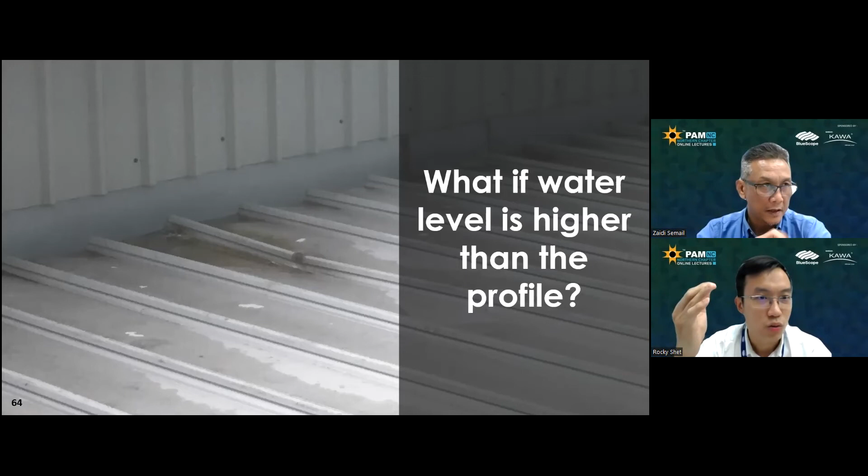If you're designing for those big warehouses, because of U value, you need to achieve a low U value, so you use insulation. Side lapping water leaking will definitely affect the material. Because if there's any water leaking through the side lapping, the insulation material will start accumulating all this water, and because it's contained within a space, the water will not easily evaporate or escape from anywhere else. So this creates a very dangerous scenario.

Water could be accumulating, and all these water-retaining substances, in the long term, could accelerate the reaction of the roofing material. Any kind of metal, with the existence of all this moisture, will start reacting faster than expected. We have seen failures like the one on this slide occur in as short as 2-3 years.

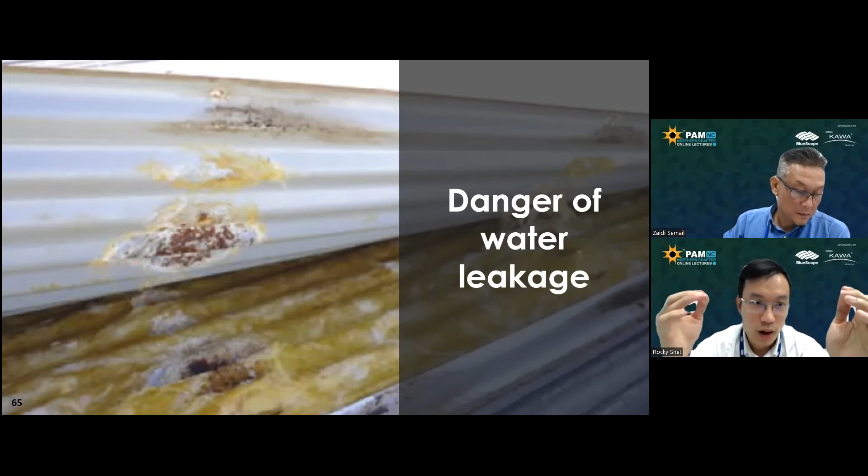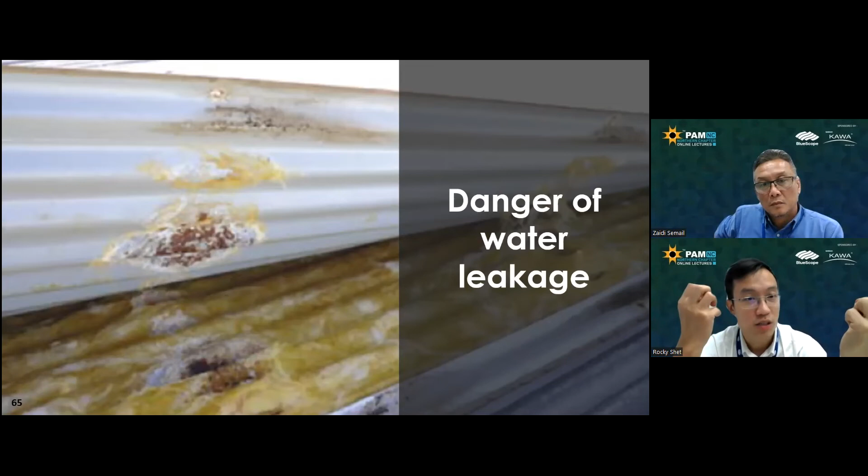So when it comes to dealing with water it's very, very crucial. Because if the water is corroding roofing sheets, that's still minor compared to it attacking crucial components that lock the roofing sheets down, like fasteners. It could start entering through the fasteners, say, just going over the rib height.

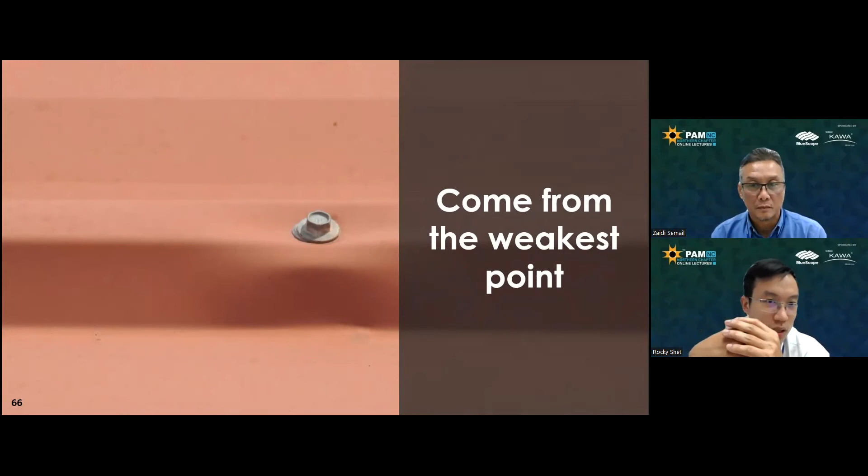If water seeps into it, the fasteners corrode faster than usual. Once it starts corroding, the fasteners can appear to still be intact, but whether there's any locking strength remaining is only a matter of using your finger to pinch the fastener and pull it out. I've seen this case, and it's quite a surprising realization—you'll be like, oh, how should I deal with this.

There are all sorts of failures that arise from abundance of rain, especially around industrial areas. Rain does not just come as pure rain—it dissolves industrial emissions, forming sulfur dioxide and so on, so it forms acid rain. All these could also accelerate the corrosion of the components. So these are some examples.

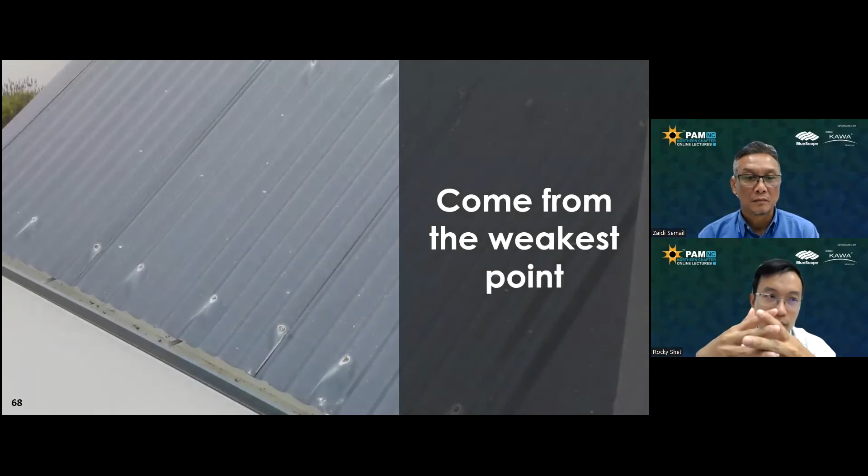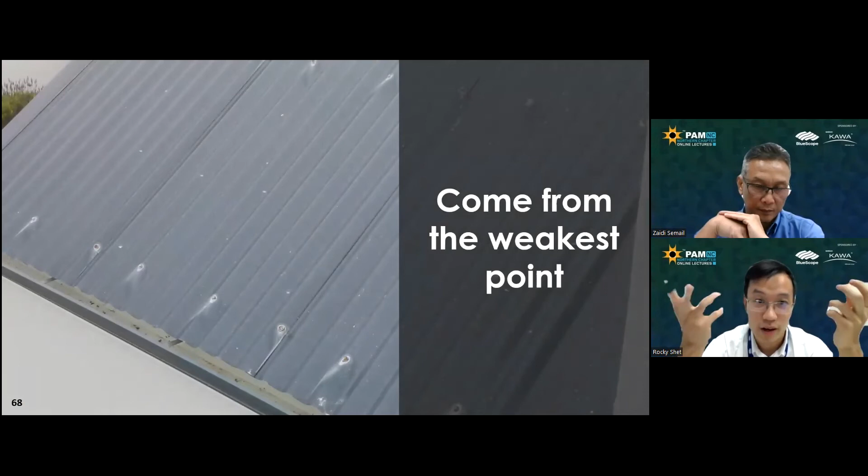So when it comes to dealing with water, one of the most straightforward things is to get your profile right first, with the thickness accounting for both the wind uplift effect and the water carrying load effect. After that, you also need to select the right components to go with it, such as the fasteners—we've constantly emphasized selecting the right fasteners, which will have a certain impact on how the roof performs, in terms of leakages or wind uplift.

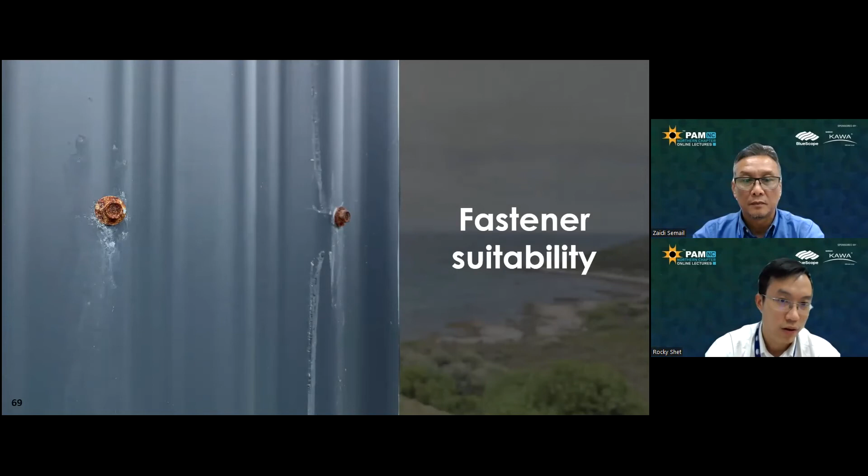Aside from that, there are other smaller components not directly relevant to the roof, such as solar panels—but it so happens that solar panels are installed on the roof. So the components of all these solar panel systems, or arrays, and how to actually mount them on the roof is also very crucial.

Coming back to the science part of things, when it comes to selection of material, we had to always be aware of the existence of galvanic series, or the galvanic reaction. It does not just restrict to 2 or 3 metals like steel, aluminum, and zinc. It happens to all metals, even the gold rings you wear on your finger. So any metals, if you pair them together, that's what we call galvanic series. Of course, galvanic series has other conditions, one of it crucially is water, or scientifically we call them electrolytes. With the condition of these, and if you contact together, then you will have what we call electrical connection, with these conditions together.

Different metals, considering electrical contact as well as electrolytes, which is rainwater, reaction starts happening - the galvanic reaction - and you have to consider whether the components you have is correct or not.

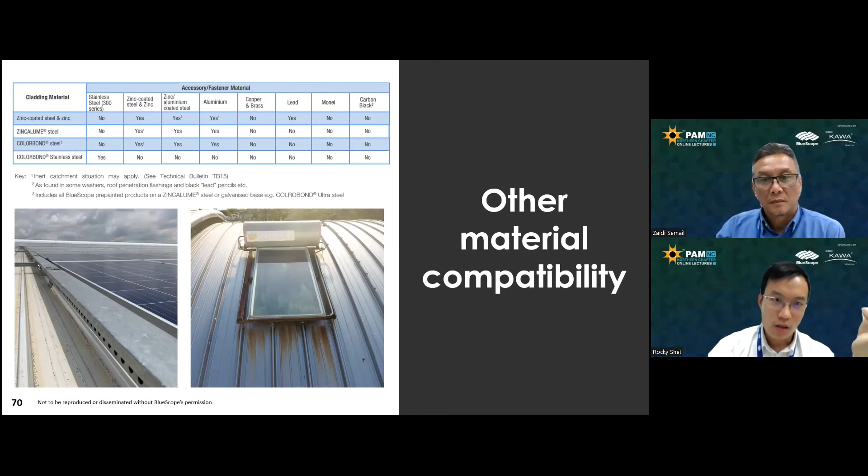So one of the common sights which we have been trying to educate the market about is that, in Malaysia we do have a lot of lightning, especially throughout this region. So there are lightning conductors to be installed, and rightly so. This system itself is normally in charge by the engineers. The original material that is still being preferred is copper. But when it comes to copper, there is a galvanic series reaction that is detrimental to the coated steel roof, where you see all these things happening.

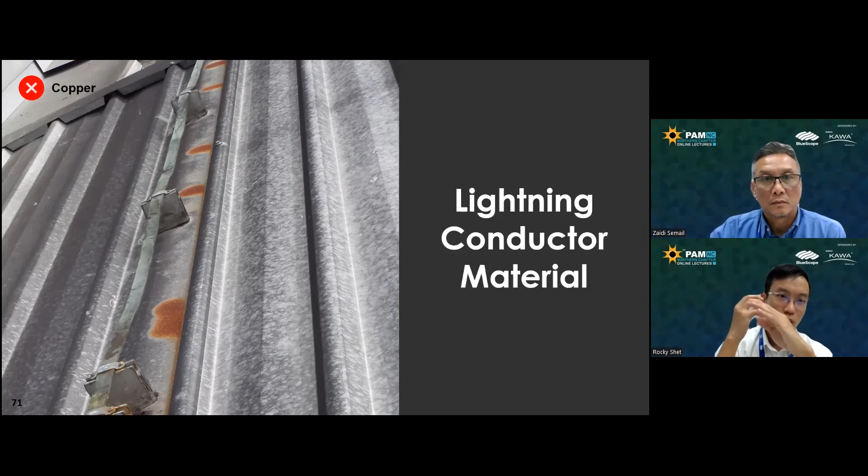This has to do with the rainwater that falls onto the copper and then leaks, and also some of the ions that come off from the copper, flowing into the water and then contacting with the roofing sheets, which is made of steel, aluminum, and zinc. All these 3 metals will be susceptible to reacting with this copper, eventually leading to corrosion happening prematurely. It's not as intended.

Of course, this needs a bit of convincing, especially for engineers. We have seen and encountered engineers who are open to suggestions and willing to consider alternatives. But we have also seen engineers who are not open to these options. So it needs to at least have a discussion rather than just assume that this will not happen - they will just be stubborn.

So what can replace copper is aluminum. In the galvanic series, it is very compatible with steel, because galvanic series wise, it will not damage the steel. In terms of conducting electricity, it is not as good as copper, that's for sure. But with the correct dimensioning, it is able to do the same job as copper - you are able to protect the whole building from lightning strikes with this alternative material, but at the same time, not damaging the roof itself. Okay, I think that is all we have to cover today.

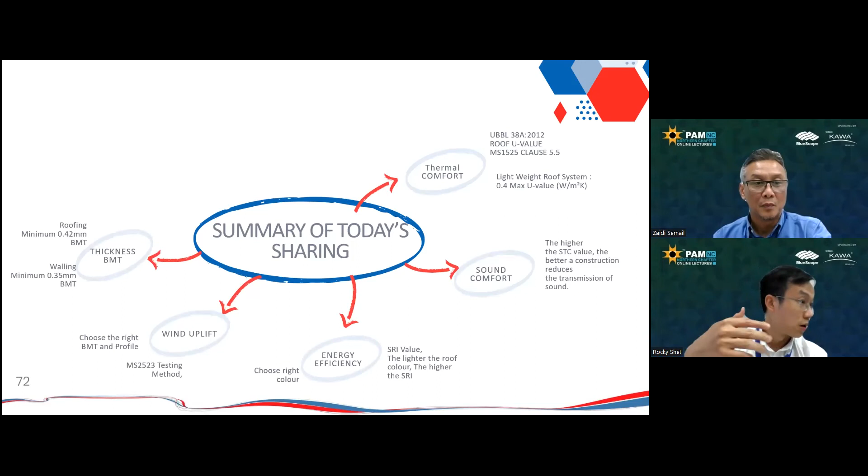And of course, when we talk about wind uplift due to changing wind conditions, you have shown certain tests to demonstrate what kind of test and what kind of profile is going to affect it. We talked about the base metal thickness, which could affect wind uplift, and rightly so it was shown. And lastly, we talked about water runoff due to selection of different profiles and also the changing wind condition. So all this has to do with how we design for the changing climate.

Okay, I think that would be my key takeaway from delivering this session today. I think there's more to say when you talk about climate change, but in this knowledge sharing presentation today, this is what we can do in our part of the industrial concept or business. We should share more if we can come up with something relevant. I think water, winds, and energy efficiency are the three main elements we talked about today.